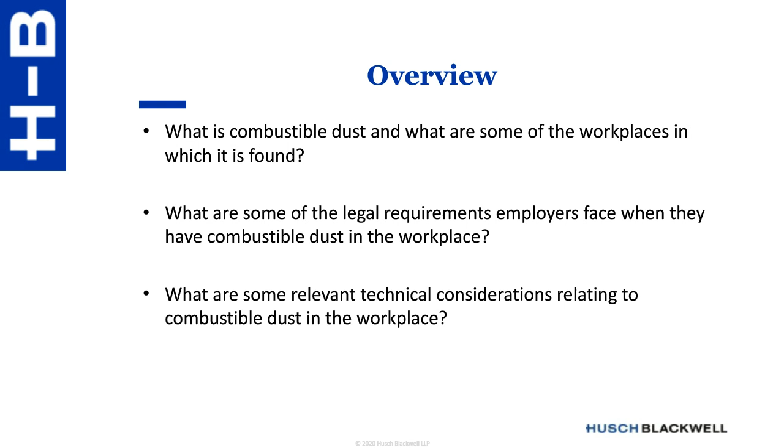Sure. Thanks, David. And thank you all for joining us. Before we go any further, I wanted to put up the definition of combustible dust. Like most technical jargon, combustible dust is a combination of words that, when put together, mean something very specific. For this definition, we're referencing the National Fire Protection Association standard on the fundamentals of combustible dust, NFPA 652, which we'll touch back on a few times as we're talking today. The way they define combustible dust is a finely divided combustible particulate solid that presents a flash fire hazard or explosion hazard when suspended in air or in the process-specific oxidizing medium over a range of concentration.

So that's sort of a mouthful, let's take it in parts, starting with the first part. So a finely divided material, what does that mean? Well, NFPA 652 gives a rule of thumb about 500 microns, below which a material will probably constitute a dust. So think table salt, except table salt doesn't fit the rest of the definition, meaning that it's not combustible. So what is a combustible particulate solid that presents a flash fire hazard or explosion hazard? Well, we'll get there as we move through this presentation.

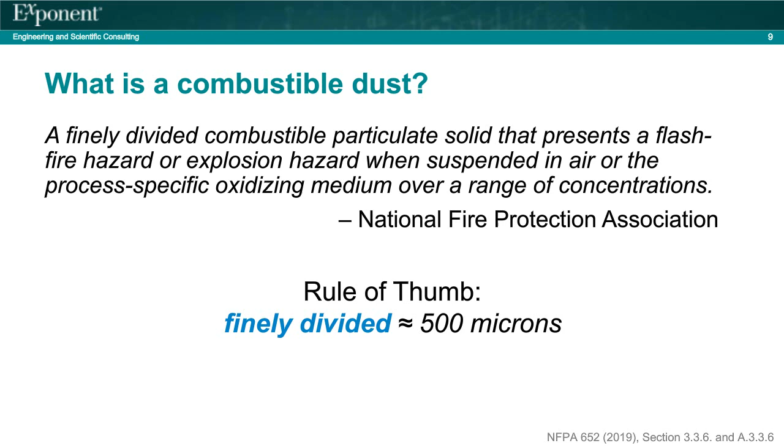So where might you find a dust that may be combustible? Combustible dust is present across a broad spectrum of industries. I suspect most of you are here because you already know that your industry may have combustible dust. I think most stakeholders are generally aware of the hazards now, but we still find facilities that are surprised by aspects of the hazard or aspects of the regulations. And there are also industries that live on the margins in some ways. The one that comes to mind is plastics and some textile aspects, where combustible dust may or may not be present depending on the specific kinds of equipment and processes. And process changes may take you in or out of consideration.

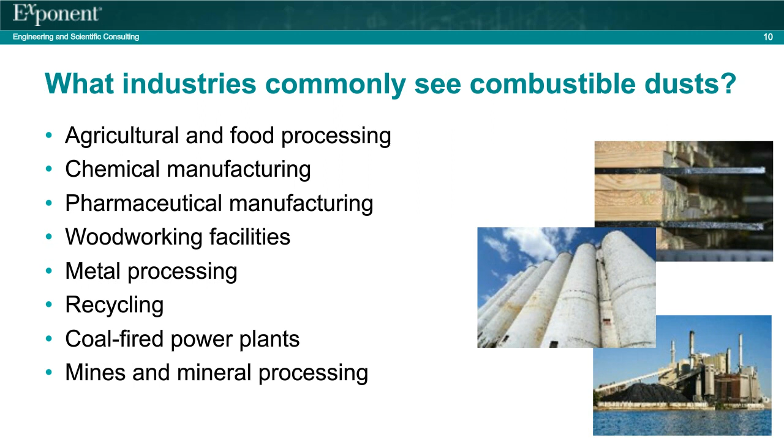So let's talk a little bit more about the dust themselves. Here is a selection of material that may merit closer consideration. One thing I'd highlight is depending on your material, it may be your product or your raw material that's a combustible dust, or it may be the waste from your material, the dust that comes off of corn, for example. There's a lot of those examples in the agricultural and food space, but also in the other industries listed here, as well as many others, I'm sure.

One thing that's also important to think about when considering combustible dust: when you think about liquids and gases, it's pretty straightforward to determine what material presents what kind of hazard. A fire explosion hazard usually just takes going to the SDS to figure out. But for the ignitability and explosibility of dust, it can be much more sensitive to circumstances, so you really need to think about the specific context.

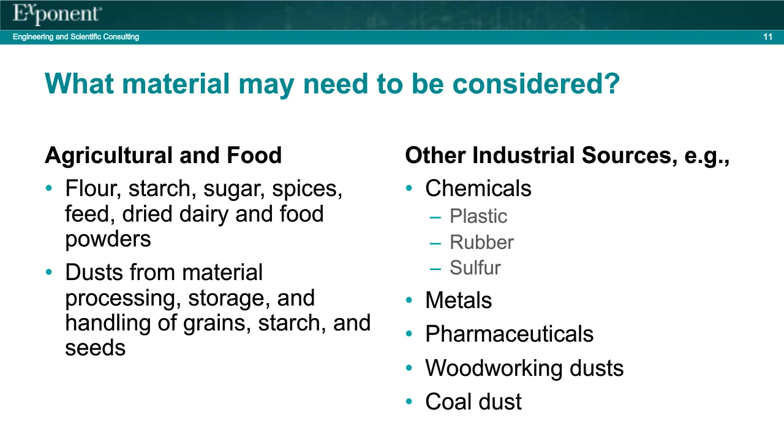So before we go any further, we'd like to pose a poll question to everyone. This was touched on a previous slide, but which choice most accurately identifies a combustible dust as defined by the National Fire Protection Association? A solid particle that will burn, solid particles that can be suspended in air, or a finely divided combustible particulate solid that presents a flash fire hazard or explosion hazard when suspended in the air or the process-specific oxidizing medium over a range of concentrations. I'll give you just a few more seconds to answer that question.

Hopefully everyone has answered. Yes, and you were partially correct, those of you that said solid particles that can be suspended in air. That's certainly dust, and that's something worthy of more consideration. But in order to be the combustible dust that we're talking about, it must also present this flash fire or explosion hazard when suspended in air or some other oxidizer. So thank you for your participation there.

So the last slide before I hand it back to Dave for a little while. As I said, the fire and explosion hazards associated with the dust are very scenario specific, so it's helpful to have a specific process in mind when thinking about if and where hazards may be present. Here we've created a hypothetical process that has some equipment used across a broad swath of industries that handle powders and bulk solids. In this toy scenario, we take some raw material and we send it through a grinding mill.

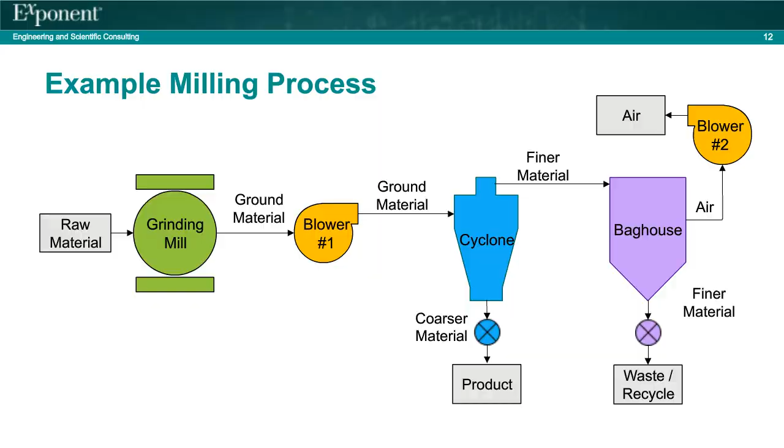Thanks, Brent. OSHA has a combustible dust national emphasis program, which puts an emphasis on inspecting workplaces that create or handle combustible dust. The program sets forth OSHA's policies and procedures for inspecting such workplaces. OSHA does not have a comprehensive rule covering combustible dust.

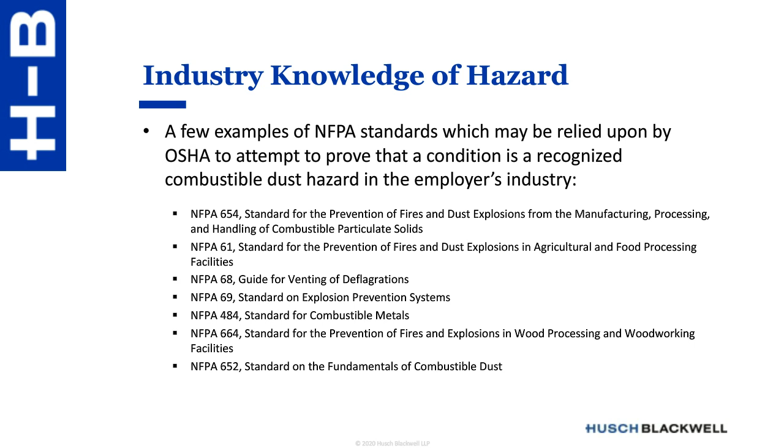OSHA must prove that a cited condition would create a significant risk of death or serious injury to individuals. Typically, with respect to combustible dust, if there is a risk that a condition could lead to an explosion or fire, this element is proved. However, if an employer can establish that a hazard would only lead to property damage and not injury to individuals, this element would not be satisfied by OSHA.

Thus, for example, if an employer can show that an explosion or fire would be safely contained within the vessels, containers, and ductwork of the processing system, and only damage to equipment would result and not injury to an employee, then there would arguably be no General Duty Clause violation.

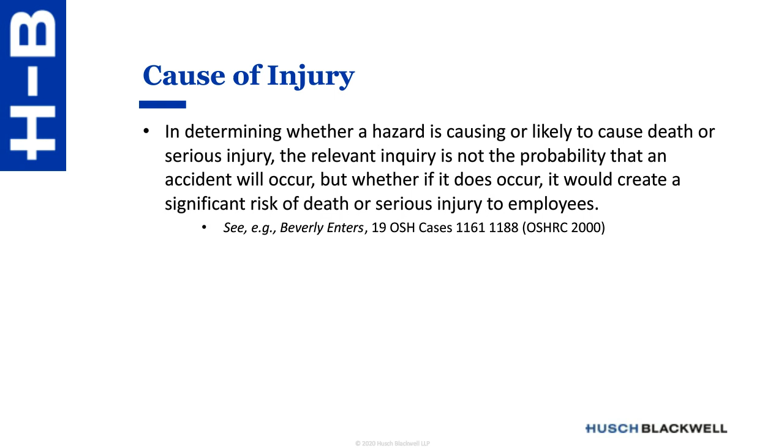And finally, as far as elements under the General Duty Clause, OSHA needs to establish that there is a feasible means to abate or mitigate the hazard.

Citations for violations of OSHA's General Housekeeping Standard may be issued if surface dust accumulations outside of dust collector systems or other vessels, equipment, and processing systems can create an explosion, deflagration, or fire hazard. Courts and the Occupational Safety and Health Review Commission have held that the standard applies to the hazards of combustible dust.

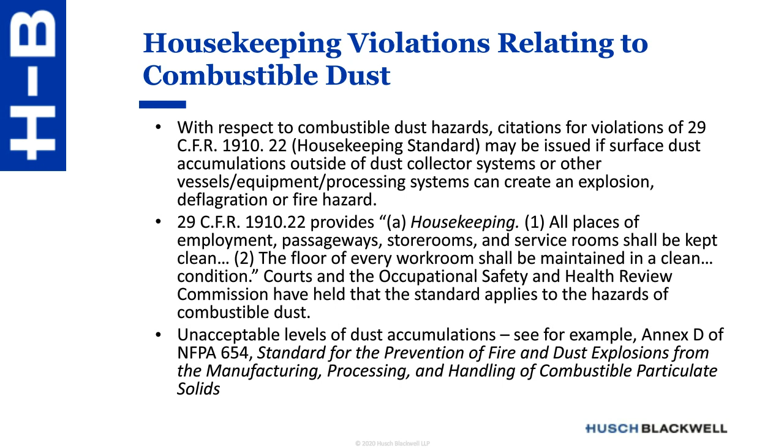Like the General Housekeeping Standard, OSHA may use Standard 1910.176 to cite excess accumulations of combustible dust in storage areas.

Standard 1910.307 and 1910.399 typically come into play where, as a result of the employer's production processes, there is combustible dust accumulating or that could accumulate on electrical equipment in various areas of the facility. For example, this can arise in the packaging areas of dairy powder production facilities, or in areas where combustible dust escapes from parts of the processing system and has the potential to accumulate on surrounding electrical equipment.

Under Section 1910.399, Class 2 locations are areas where combustible dust may be present in various hazardous concentrations. Class 2 locations are divided into two divisions, Division 1 and Division 2. Division 2 locations are, very generally speaking, areas where combustible dust is in the air not sufficient to create an explosion hazard, but sufficient to cause accumulations of dust on electrical equipment.

An employer is required to classify the areas of its plant and only allow for the use of equipment which has been approved for use in the classification location in which it is being used.

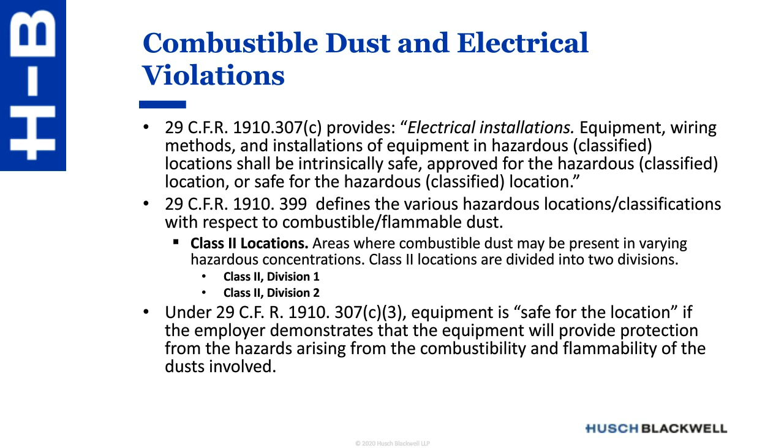The hazard communication standard, which most people are familiar with and is applicable to most employers, defines hazardous chemical, and hazardous chemical is defined to include combustible dust. As a result, employers that have combustible dust in their facilities have to provide information and training on combustible dust to employees.

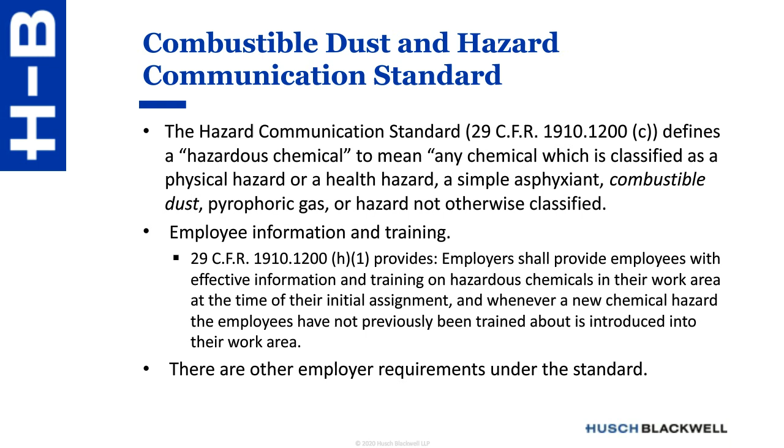As I mentioned before, OSHA typically uses NFPA standards to show that a particular condition or process existing within an employer's plant is recognized as a combustible dust hazard. What is important to understand is that most of the NFPA standards OSHA will rely on provide that one can comply either by complying with the specific rules set forth in the standard or by complying with what is known as the performance-based approach.

These NFPA standards typically set forth specific rules or requirements that should be followed with respect to what must be done by way of a process or equipment handling combustible dust in order for the process or equipment to be safe. OSHA will usually reference one or more of these prescriptive rules in its citation in support of its position that a condition existing at the plant is recognized as unsafe. However, those NFPA standards state that you don't necessarily have to comply with the prescriptive rules to comply with the standard, but rather you can comply using what is known as the performance-based approach.

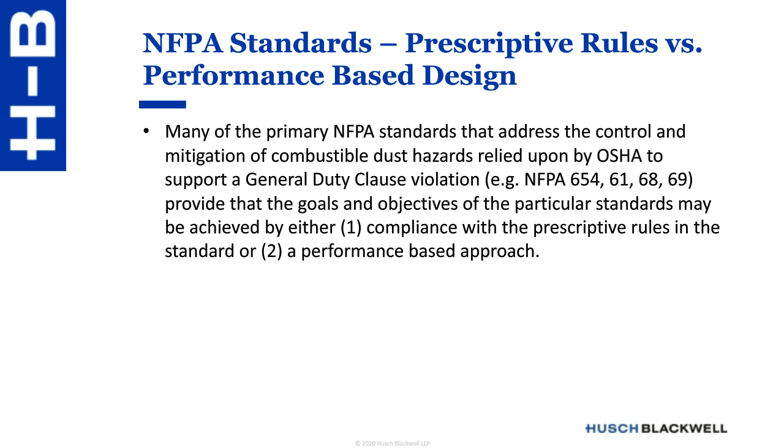For example, an NFPA standard might say that a rotary valve must be of a particular design to serve as an isolation device with respect to explosions and deflagration. However, an employer in the dairy industry might prove that such design is not workable in the dairy powder industry, as the rotary valve would become clogged by the powder, and that an alternative design used by the employer would still effectively stop a deflagration from progressing downstream from the rotary valve, in which case that would offer a defense.

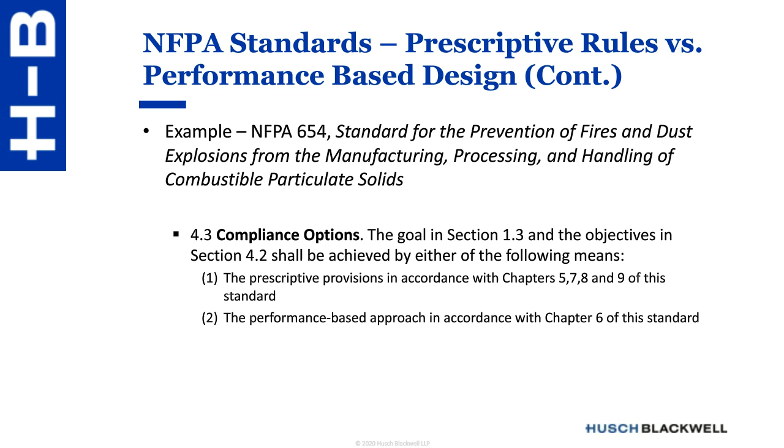In addition, in each of these NFPA standards, there is what's known as an equivalency provision. So if you're able to show that what you're doing is essentially equivalent as far as the various items shown on the screen, even though it's not what's specifically prescribed in the rules, then you are still in compliance with the standard.

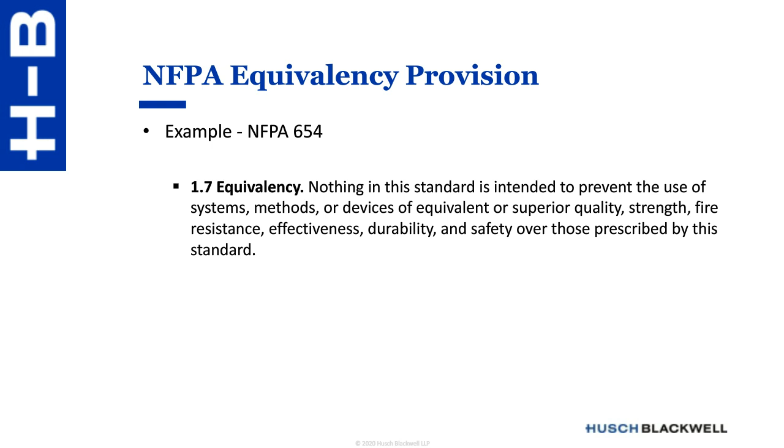Finally, I just want to mention that an employer who has combustible dust within its facilities, it is a good idea to conduct a dust hazard analysis to help ensure that the employer is safely handling and using such dust so as to avoid an explosion or fire. Also, NFPA 652, which again is only a voluntary standard, provides that a dust hazard analysis should be performed for facilities where combustible or explosible materials are present.

DHAs are to be reviewed and updated at least every 5 years. Finally, since we're getting very close to the date, it should be noted that when NFPA 652 was originally made effective, on September 7th, 2015, it provided that then-existing processes and facility compartments that existed as of that date had until September 7th, 2018 to do the DHAs. That deadline was extended to September 7th, 2020.

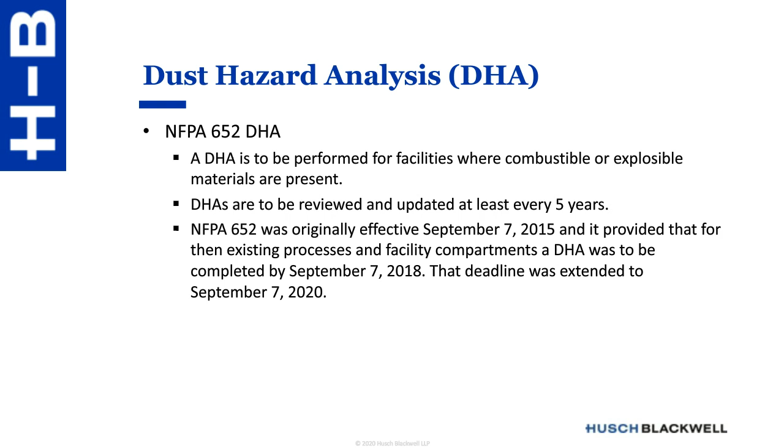Dust hazard analysis under NFPA 652 are to provide for the evaluation of fire, deflagration, and explosion hazards, and provide recommendations to manage those hazards. Typically in DHAs, you will find addressed many of the things Brent will be talking to you about: dust explosion characteristics, airborne dust concentrations, potential ignition sources, isolation, containment, explosion suppression, and venting systems, and what additional safeguards are needed. Again, a big part of those DHAs is to identify potential hazards relating to combustible dust.

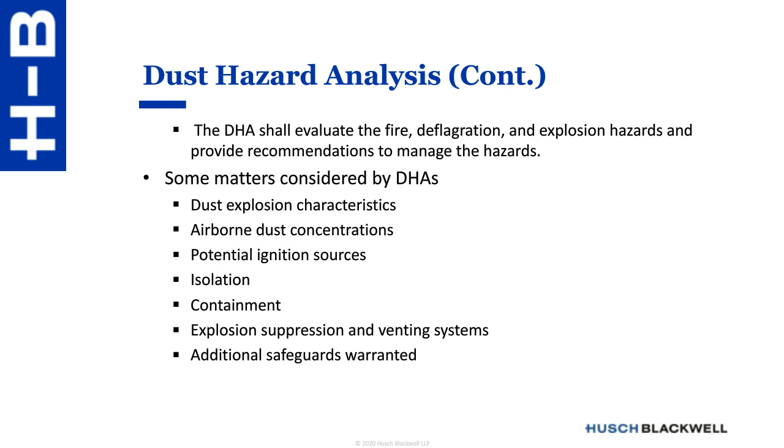With respect to factors you should consider before you arrange for a DHA, there are a few of them. Obviously, one is cost, and cost is important, but it should not be the overriding concern. Second, and probably more important, is the qualification of the expert or consultant that's going to be doing the DHA. They're not all the same, and they don't all have the same specialties. An employer wants an expert or consultant that is experienced in their particular industry and also experienced with respect to the particular type of operations that the employer has, because they can make a big difference.

I've had situations where an employer, a client, has retained an expert who came back suggesting that various steps had to be taken, totaling costs of over $250,000 just to do. Another expert came in and said, no, you don't need to do that - you can make it just as safe. If you consider all the factors, it'll be just as safe by spending as little as $10,000. So you need to take care in doing that.

And then finally, an employer should decide whether to have the expert or consultant retained by outside legal counsel to possibly establish a basis for not having to disclose the report to OSHA in the event of litigation, based on the attorney-client privilege or what is known as the work product privilege. Further, an attorney experienced with combustible dust and their hazards can also help appropriately guide and direct the efforts of the expert or consultant.

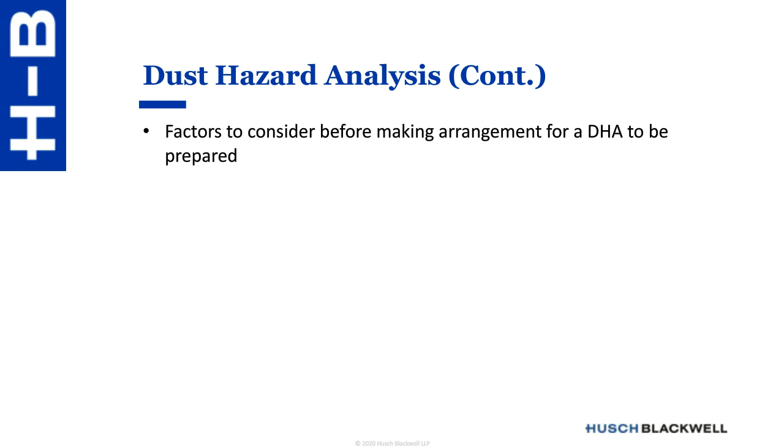So first, let's take another poll question. Does NFPA 652, the standard on the fundamentals of combustible dust, provide that dust hazard analyses are to be performed? Yes or no? I'll give you about 10 seconds to answer that question. Okay, thank you very much. Easy answer, thank you all.

Okay, so Dave talked a lot about hazards, so I thought I would drill down a little more on the specifics of the hazards we're talking about here. The first is combustibility or flammability, and the other is explosibility or explosion hazard. So to manage the hazard, first we have to understand what it takes for that outcome to manifest, or stated differently, what ingredients we need to keep apart to prevent the hazard from being realized.

The concept of the fire triangle is useful in this regard. For a fire to occur, three things must be present: there must be a fuel, your material must be capable of ignition; there must be a competent ignition source, which is to say a source capable of igniting your specific fuel; and an oxidizer must be present, which is usually air, but it doesn't have to be. Finally, there must be a situation in which these three factors come together into a viable ignition scenario. This last part is usually not included, but is an important factor.

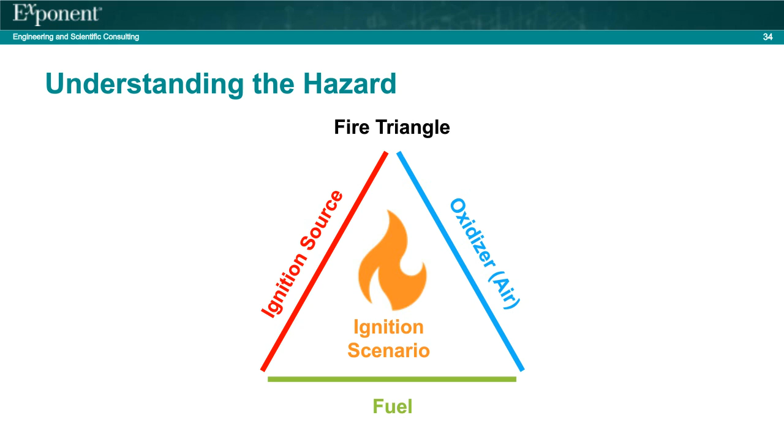The explosion hazard is similar in nature, but there are a few additional ingredients you need. First, we're talking about dust here. The dust must be suspended in air at a concentration capable of supporting an explosion. Were this mixture to ignite in free space, a flash fire may occur. However, if the mixture is physically confined within a container, the pressure may rise and the container may ultimately fail, and that release of elevated pressure is what we call an explosion. So for that explosion to happen, you need some sort of confinement to allow that overpressure scenario to develop.

Thinking about gasoline again, a pool of gasoline can support a fire, but you need that engine cycle to be timed right so that the fuel-air mixture is pushing that piston with its overpressure. That's a little explosion. Sort of.

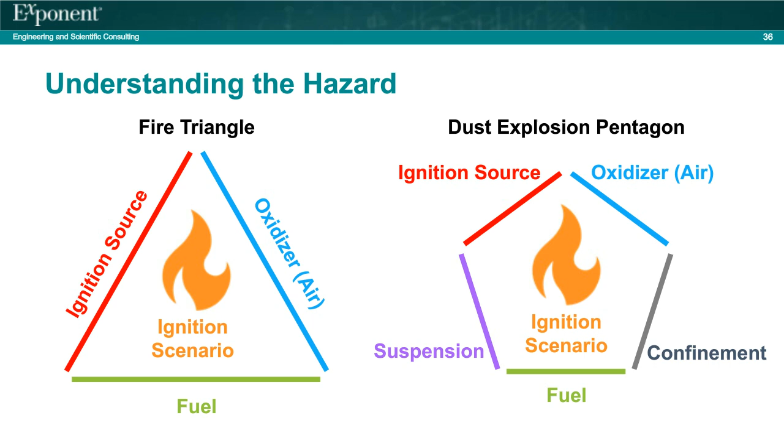Now let's take a look at each of these legs of the pentagon and under what circumstances, when and where each of these components may exist. The foundation here is the fuel. Dust cannot participate in a fire explosion if it does not present a fire explosion hazard. Let me state that again: if the dust cannot participate in a fire explosion, it does not present a fire or explosion hazard.

So how do we tell? Well, for gases and liquids, as I said earlier, you can usually look up the SDS and figure out the flash point, the flammability limits, and determine if your process is in that window. That goes a long way towards understanding the circumstances where those materials can serve as a fuel. However, with dust, the SDS usually doesn't provide that much information. It may identify the potential for a fire explosion, but the circumstances are usually less well defined.

In other circumstances, the material may not be considered a dust as received, but due to some processing or something else, combustible dust may form. So in these situations, and probably most situations, some testing is necessary to understand when your material may be a combustible dust.

There's a variety of places where you can have these tests done. From my work for Exponent, we have a dust testing lab in the Boston area that we use company-wide. But the first question you're asking of your material during a test is usually how much and how fine is it? What does the particle size and morphology look like? This can be as simple as taking a stack of sieves and shaking the mixture for a while, letting it divide up by size, or it can be done through laser-based analytical tools using laser particle size measurement.

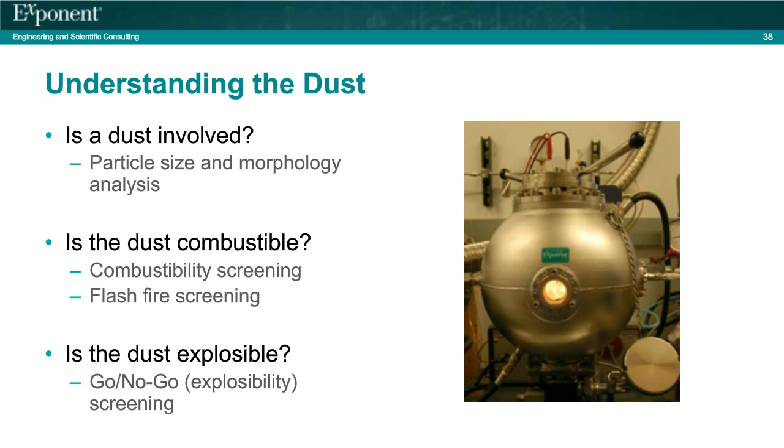But if it is explosible or combustible, you'll need to figure out under what conditions that hazard may manifest. That's when you need to do a little bit more testing. As I described earlier, with a flammable liquid or flammable vapor, you can usually go to the SDS and figure out the flash point, or the lower and upper flammability limits.

For dust, there's a similar, although not exactly the same, concept called the minimum explosible concentration. Here, the word maximum doesn't belong. So what range of concentrations might the dust be explosible in? That can be compared back to your process - what range of concentrations are relevant to your process. We'll talk about that a little later, but it's how much dust per unit time versus how much air per unit time, which then gives you a concentration.

Now, MEC can vary significantly depending on the size of the material, the humidity or moisture content of the material, and the test method. I just took a few examples here: for corn, depending on the size of the specific sample, you may see the MEC go up or down. Similarly, for magnesium, as you go down in size, you go down in MEC. For corn, as you go down in size, you go up in MEC. And there's also variation in the test method, so that's certainly not a rule to be used - it's usually recommended that you test your specific material.

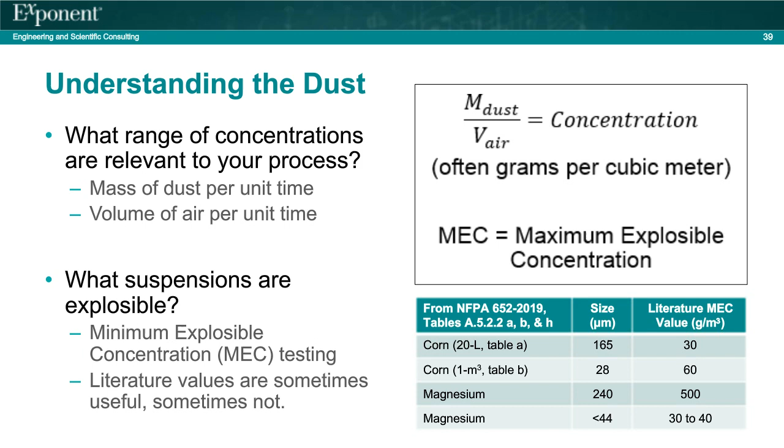When you're collecting your material, it's important to consider what samples represent the specific area you're analyzing, and think about what, where, and how much material you may need to collect from those areas. Certain tests require more material than others, and if your process doesn't generate a lot of dust, first, good for you, but second, it may be hard to get enough to do the testing, so you may need to plan in advance.

Material can be prepared on site. It can be ground or sieved to separate out the fines, but you need to think about why you're doing that and what you're testing. Many labs recommend a sample be sieved through a 200 mesh, so all the material tested is 75 microns or less. That's really good for understanding worst case scenarios, but may or may not have the value you're looking for.

Other aspects: do you want your sample dried, or is there a specific moisture content that's relevant in your process? And then there are other ignition susceptibility tests, such as minimum ignition energy, minimum ignition temperature, electrical properties, and self-heating for materials that are susceptible to that.

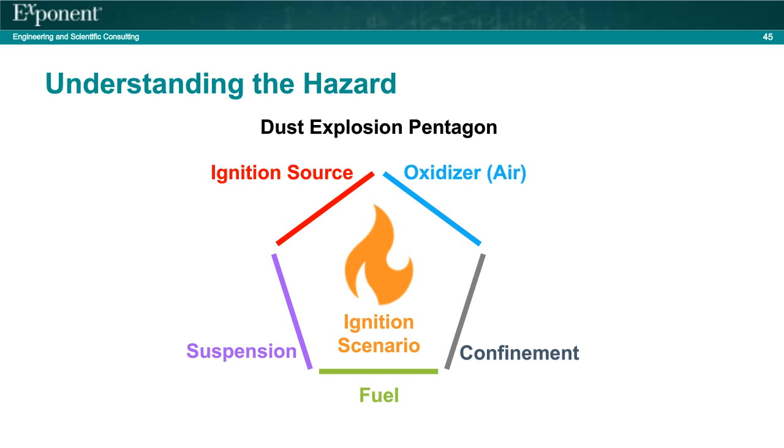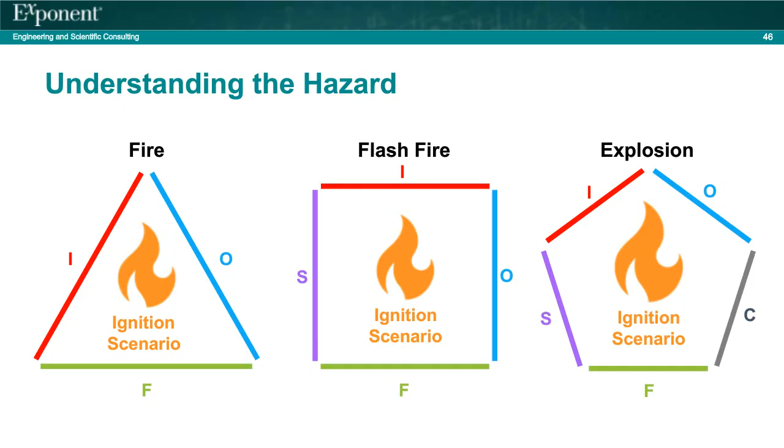Just to reiterate here, the different types of hazards, the flash fire hazard that I put here in the middle, you just remove confinement from explosion. But as we're thinking through our hypothetical milling process, we want to think about those hazards.

Before I go any further, we have another poll question. According to NFPA 652, which conditions are required for a dust explosion to occur? There are four options here: a combustible dust suspended in an atmosphere able to support combustion at a concentration greater than the minimum explosible concentration; confinement of the dust cloud by an enclosure or partial enclosure; an ignition source of adequate energy or temperature to ignite the dust cloud; or all of the above. I'll give you another about 10 seconds to answer that.

Thank you all. Again, an ignition source is necessary, but all of them have to come together for that dust explosion to occur.

Back to our hypothetical milling process, and I reiterated again these hazard triangle, hazard polygons, but we're going to focus as we're talking through these next slides on just the explosion hazard for simplicity.

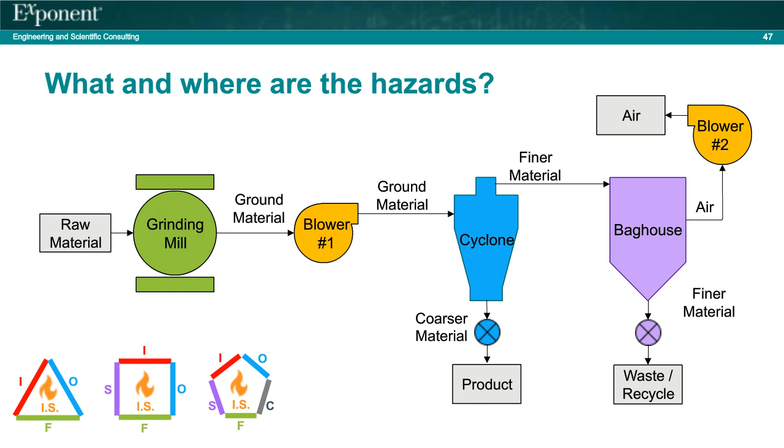Our first step is to look at the fuel air suspension within the equipment. Keep in mind this will likely change as you move throughout the process. You may need to consider transient events depending on your kind of equipment, such as a bag house. Is it a pulsed air bag house?

As you move through the pieces of equipment, you would notice the material within the product stream is changing in shape and size and distribution. So because explosibility depends on material size, as you grind, separate the material, the MEC also changes because the particle size is changing.

So one strategy is to start at the finest and work back. If you find this material is explosible per the go no-go test, then you might need to consider the next leg up. If you don't, then there's a chance you can stop there.

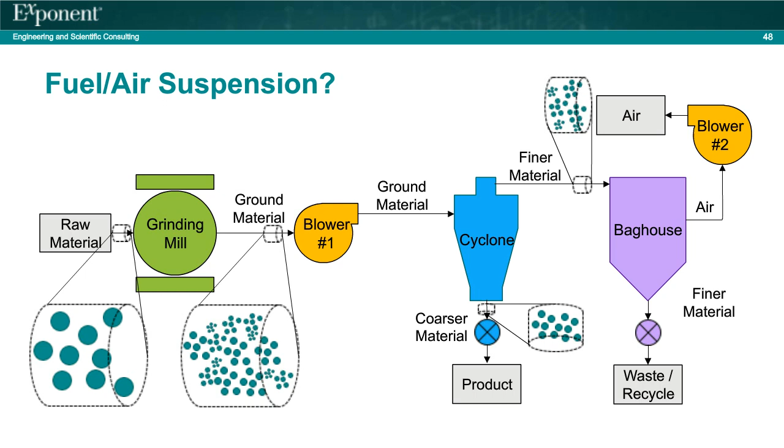So what about ignition sources and ignition scenarios? Well, the type of potential ignition sources you have in the system will dictate testing and vice versa.

Static electricity may be adequately managed by bonding and grounding if your minimum ignition energy is sufficiently high for your material, but if it's too low, you may need to consider other protective measures due to the risk of electrostatic ignition.

It may take more tests to specifically understand the sensitivity of your material to high temperatures, to mechanical sparks, or other ignition mechanisms that could be introduced by grinding mill or other size reduction equipment.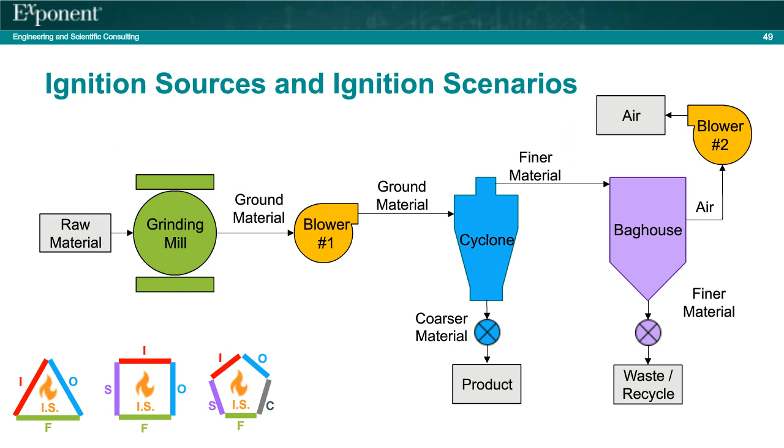Containment or venting. So if you have an explosion, what kind of pressures might you expect? We talked a little bit earlier about explosion severity tests. Those usually produce a maximum pressure and then a measure of the maximum rate of pressure rise.

That's the kind of information you need to perform this kind of evaluation, and will also inform what kind of protective measures, such as containment, venting, or suppression that may need to be considered.

You also will, at this step, particularly if considering containment or venting, need to think about what kind of equipment you have. You'll need more detailed information about your equipment specifications. Process geometry may also be relevant.

And so I've spoken a lot about hazards, but I've only made passing reference to safeguards like explosion venting. And to that end, I wanted to at least touch on what you might do with all of this information. Of course, not all hazards can be avoided or eliminated.

The remaining hazards are generally managed through a variety of methods, either controls or safeguards, call them what you will. But if they're independent safeguards, they can provide an independent layer of protection against a potentially hazardous outcome.

Of course, no safeguard is perfect, so there's this Swiss cheese model that is often referred to where a potential outcome manages to make it past one independent layer of protection. Will it make it past separate independent layers of protection and ultimately realize a hazardous event? Obviously, the more independent layers of protection you have, the less likely it is to line up these holes.

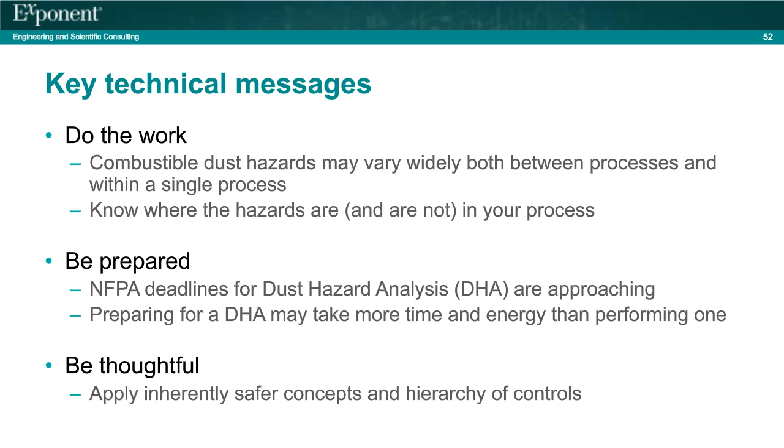And with that, I'll hand it back over to Dave if there's anything else to add. We have Brent, we have just a few minutes, so maybe it might be helpful to walk through. Again, not saying that OSHA would be correct, but if this is what OSHA is confronting, this process that's on the screen now, they're going to come in and question the blower, just as Brent said.

Is that assuming maybe that's an ignition source? Does it meet the requisite specifications? From the standpoint of the cyclone, if you look at the bottom of the cyclone, it leads down to the larger, goes down to the product.

That's likely down in an employee area. In other words, below the cyclone, there's likely an area where employees go to pick up that product or something. OSHA will say, well, why don't you have isolation if there were an explosion in the cyclone, isolating it so that employees couldn't get injured? And then OSHA may come in and say you don't have isolation.

If you did have isolation higher upstream, either from the cyclone or higher, and you had the deflagration coming down towards the bag house, why did you not have some form of isolation, explosion suppression devices, or something else to isolate and protect the bag house?

Obviously, OSHA would be looking and saying, well, is the bag house vented, or does it have some other explosion suppression device on it? Again, with respect to under the bag house, materials dropping down in that waste recycle area, likely that's an area where employees are.